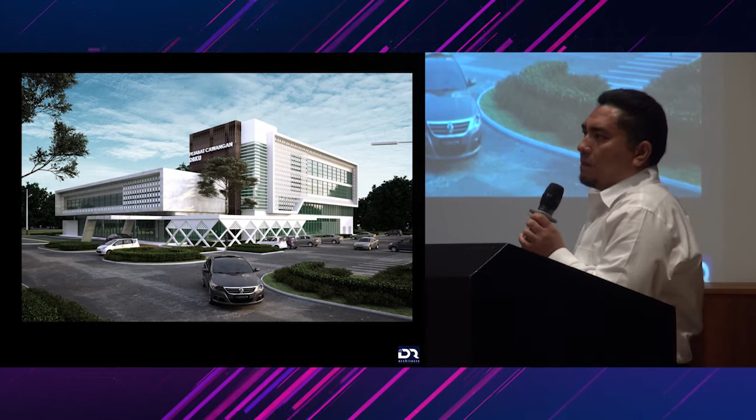We referred to the Sarawak Kena series on Tudung Keringkam, a very detailed research done by Kamen Salem, where in his book he mentioned that there are certain flowers available in Kuching that inspired the embroiderers to put motifs into the design. For example, the bunga kenanga shown in this motif, and the bunga Tanjung, which is widely available at Kampung Tanjung within the DBKU area. With this idea of incorporating the motif into the design, we tried to articulate the facade with this motif.

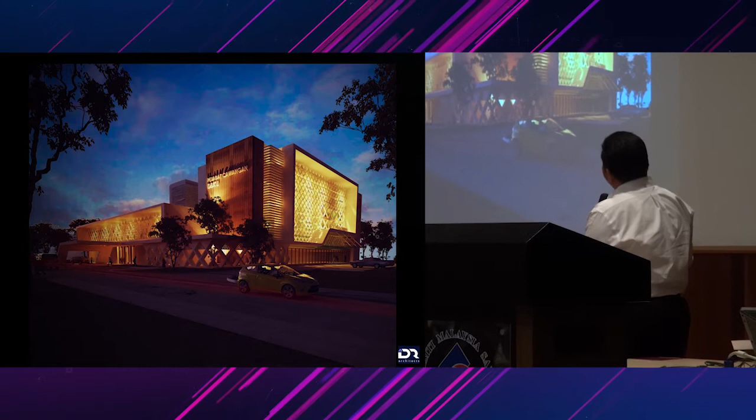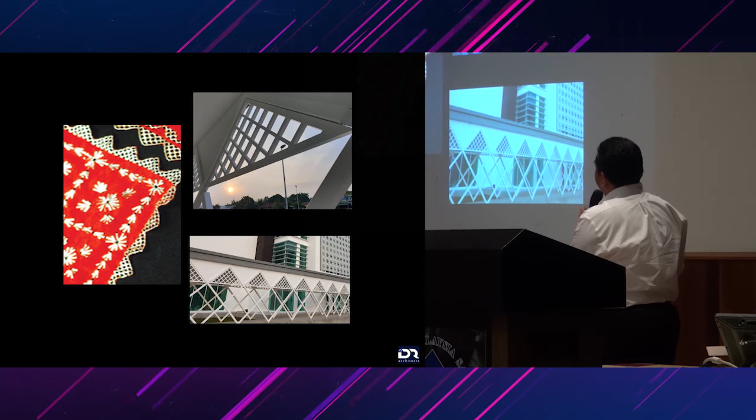We designed the building with lighting to enhance the motif at night. This is the photo showing the newly completed building at Jalan Depot, and as you can see, we tried to express the pattern of the shawl into our structural element. This is the corridor, where you see part of the motif shown as a sun shading device, and we also repeat it in our structure.

This is the surface of the motif as part of the facade articulation, and as you can see, the fabric is actually transparent. So when you are in the enclosed space defined by these motifs, although you are enclosed, you can still see a glimpse of the outside world.

As Margaret Brooke described in her book, she was taught how to wear the keringkam shawl in a traditional manner, where you need to cover one part of your eyes, because the fabric still allows you to see the outside view, with the pattern of the motif cast as shadows onto the floor. So that's how we tried to showcase the cultural element of DBKU in this design.

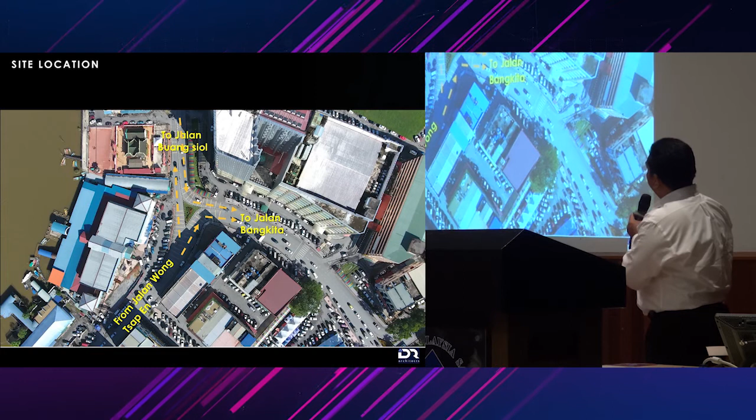The site is shaded as a red colored area. This is the Limbang Plaza. Another view — this area is now being developed as Limbang Waterfront.

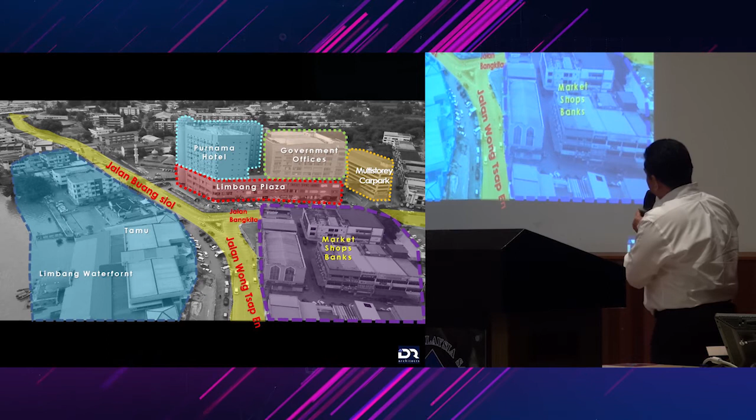So we break down the land use of the area. This red shaded area is Limbang Plaza, where you're going to find shopping malls. This part is the Purnama Hotel, a very famous hotel in Limbang. This is the government office and the multi-story car park. While this area, you find a lot of shops and banks.

This blue shaded area is the Tamu and Limbang Waterfront. The Tamu is very important for tourists to buy souvenirs whenever they go to Limbang, especially the Bruneian.

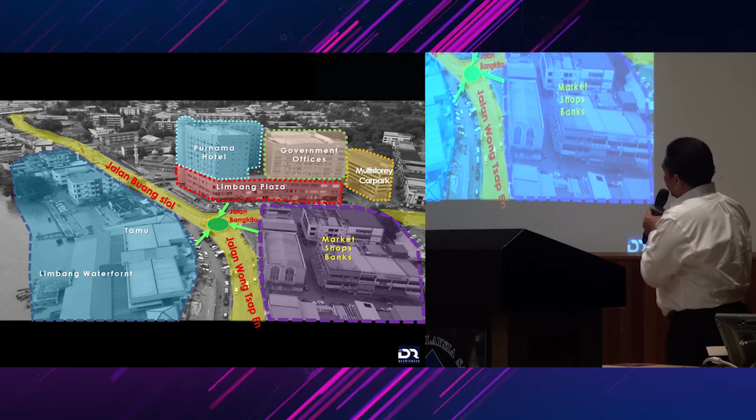So the task is to link all these three different zones by a pedestrian bridge. Looking at this in 3D form, we need to bring up the pedestrian from the ground level up to a certain higher level, and connect it to the center of this green turf area. Then there should be a connection on the first floor of this Limbang Plaza and to the first floor of Tamu.

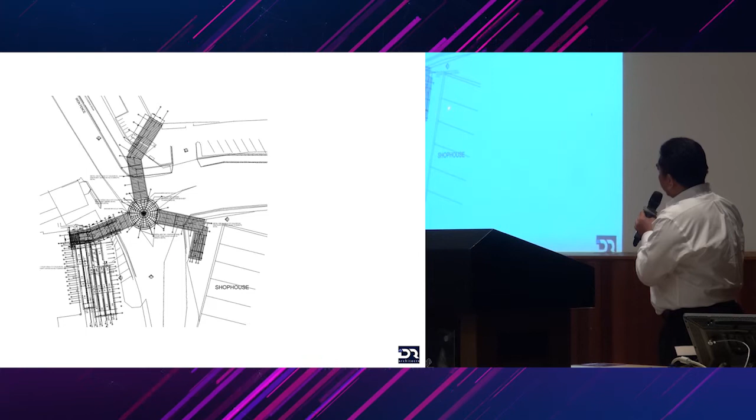Due to the site constraint, because of very limited space for us to locate our structural element, we came up with these floor plans, where from the hotel of Limbang Plaza, going to the center point, and from the shop house also meet there in the middle, and towards this Tamu.

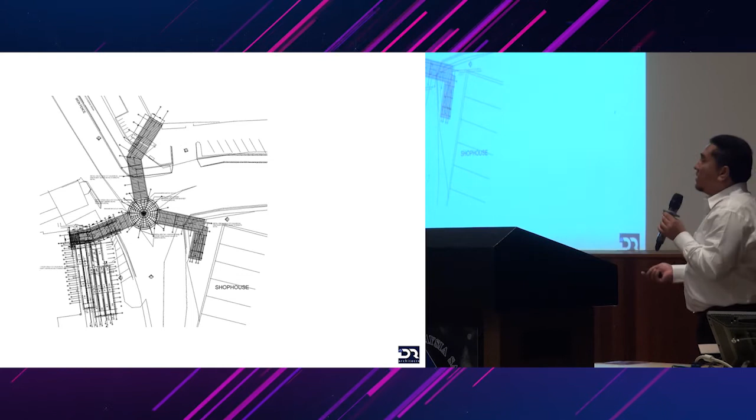When we presented this to the local community, they asked us whether we got the idea from Cap Kaki Tiga. I didn't understand what that meant. What he meant was the shape looked like this. So now they're giving the nickname of the bridge as Jambatan Cap Kaki Tiga.

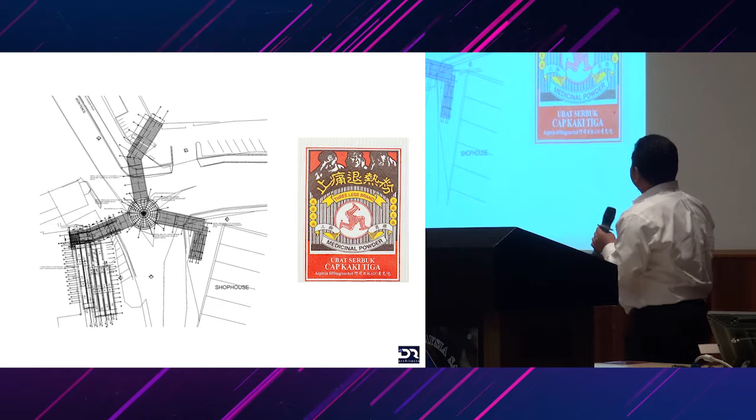So that's on the planning side. We need to design the facade. The strategy is to make this bridge become an important landmark for Limbang. So we look at the idea of repeating the statue element, and we try to bring in the horns, the buffalo horns.

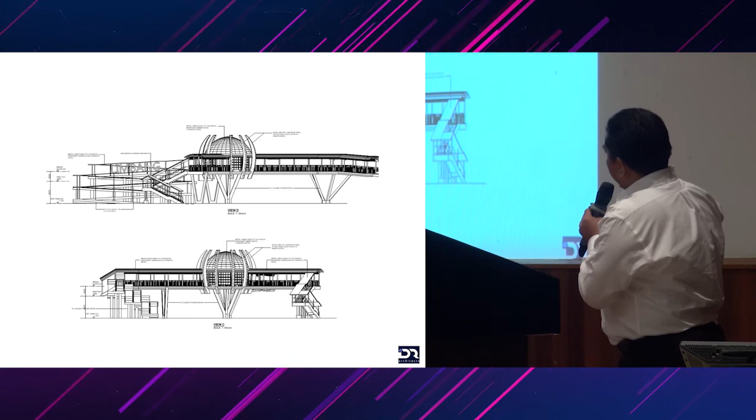Into the facade design. So this is the section of this bridge, and the 3D illustration where the bridge will connect to the Limbang Plaza and the shop house and the Tamu.

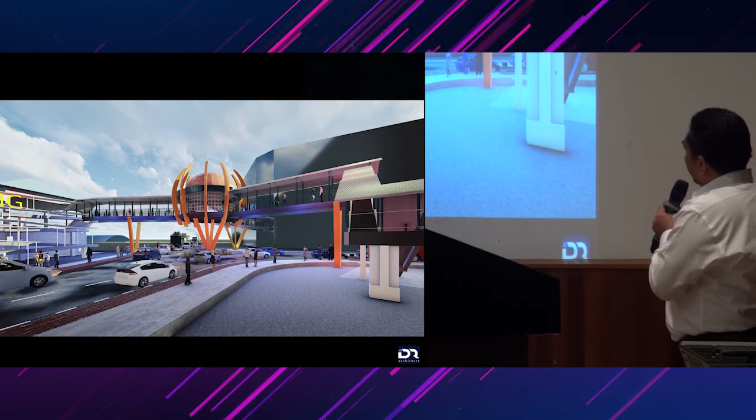There will be a pedestrian ramp here that allows disabled people to use the bridge from the Limbang Plaza. Another view from the shop house area, from Jalan Buangsiol. This is the Tamu, first floor, connected to the Limbang Plaza. Another view from the shop house area.

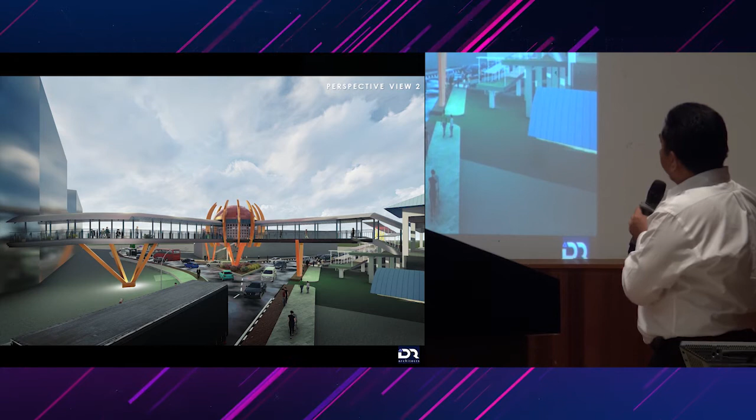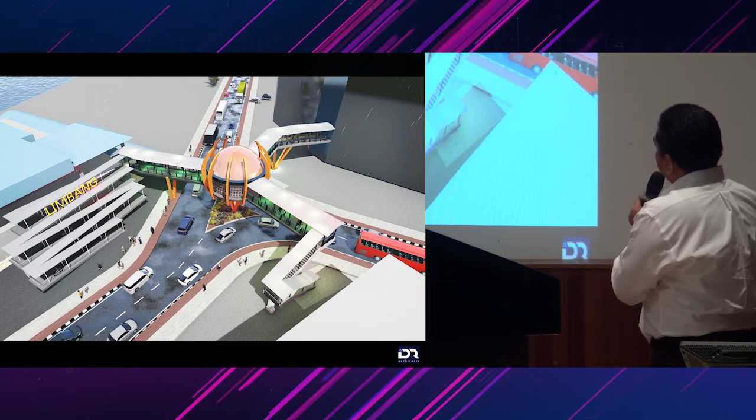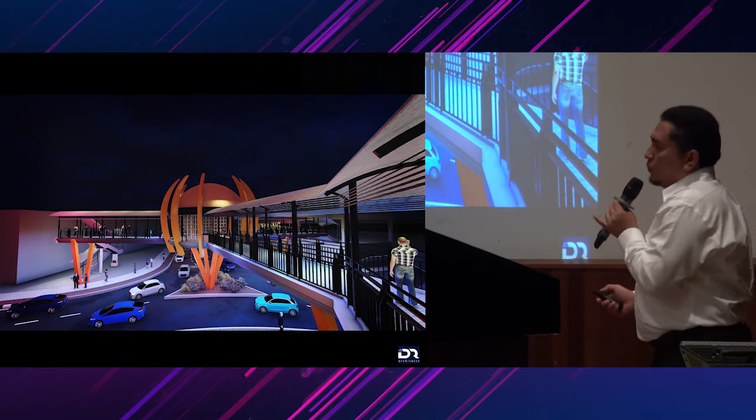So we try to make this part of the bridge an important intersection and also a new landmark for Limbang town. A view from the aerial view of the bridge, and a view at night. This is one of our efforts to celebrate the local culture into the design of the bridge.

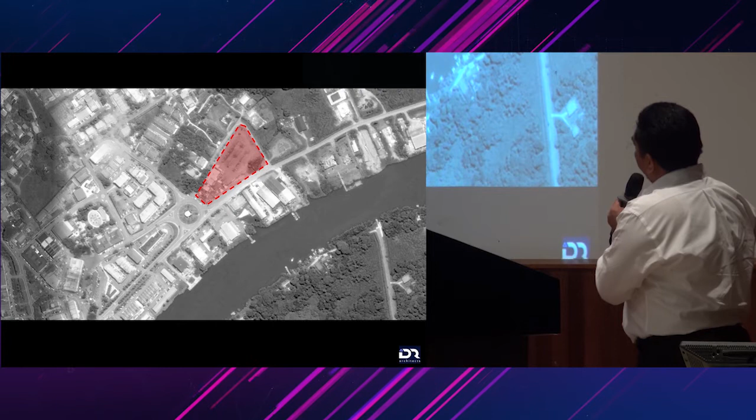Next project is Pasar Tamu Lawas. This Pasar Tamu is located at the previous site of Pasar Tamu. The site is very challenging because the shape is like a trapezoid, and we were asked to arrange the site planning in a proper, orderly manner.

Lawas is very famous with ikan tahai. Whenever people go to Lawas, they'll always bring ikan tahai back as souvenirs. The background of ikan tahai is that fishermen need to find ways to survive during monsoon season, because they cannot catch fish then. So during the time when there's a lot of fish, they will try to produce small fish to preserve some source of income during the monsoon season, and ikan tahai developed from this. They produced a lot of local delicacies using ikan tahai as the raw material.

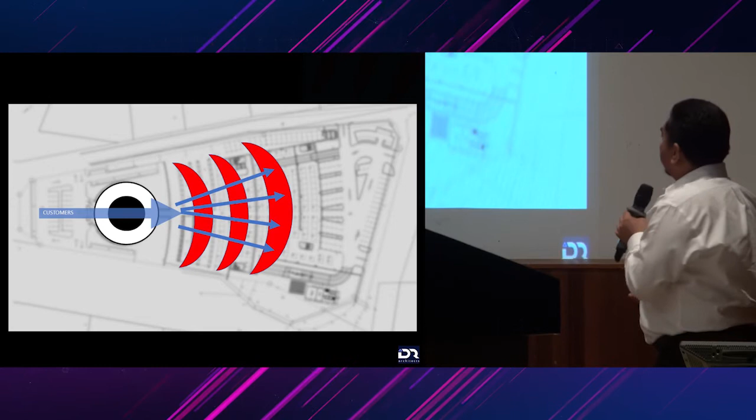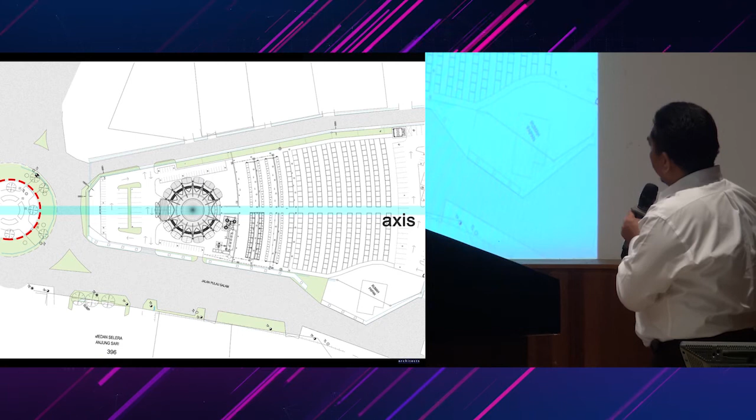We try to use this metaphor of fish, symbolized by the fish eye and the fish gills, representing how this system absorbs the income for the sellers. We try to relate the whole complex to the town by originating the radius of this arrangement to the important landmark of Gasing, Bulatan Gasing, developing the axis from there.

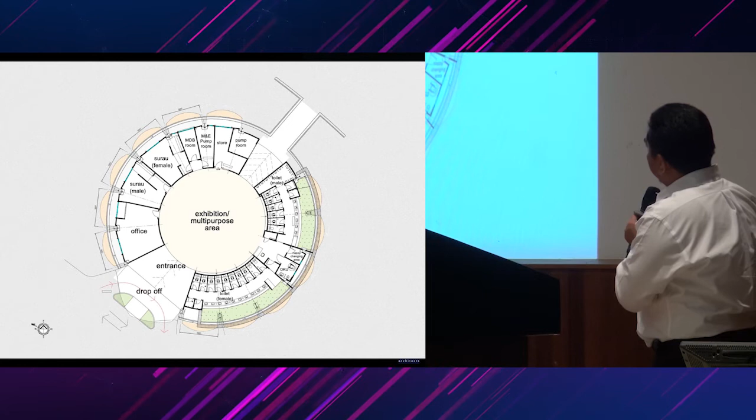These are the accommodations provided at the main building: office, surau, toilets. This section shows the space relationship where the main building, the fish eye, relates to the fish gills, and another bigger fish gill at the back.

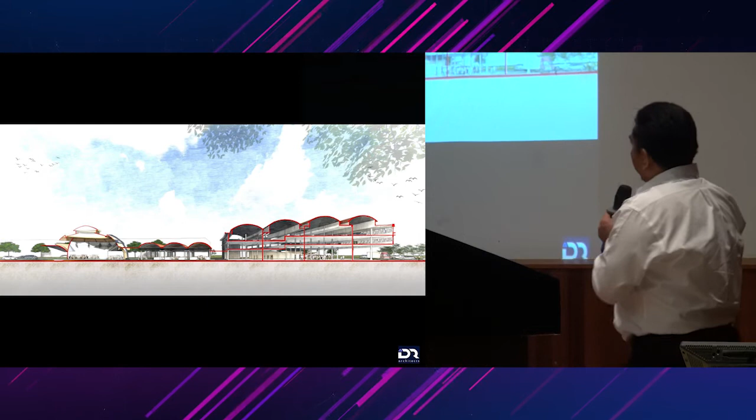Currently, phase 1 is already completed and phase 2 will be tendered soon. This part here will be used for the Tamu Besar, and the upper level will be used for the car park.

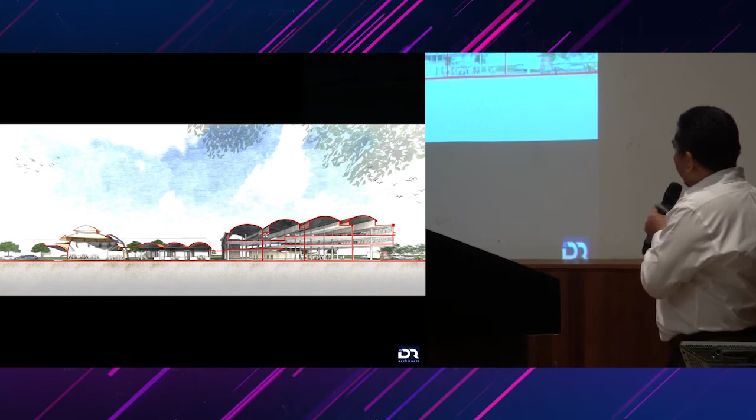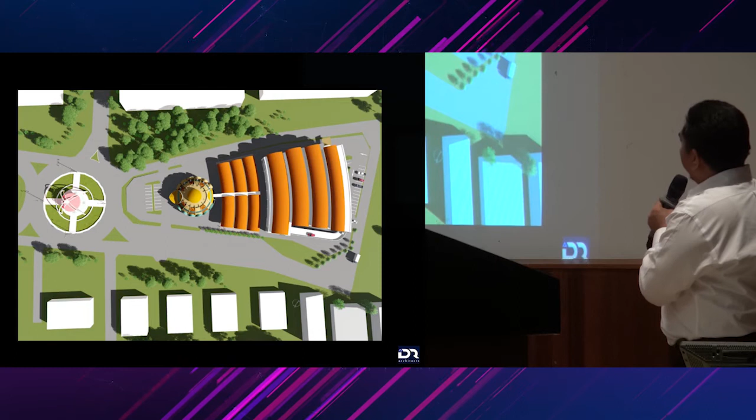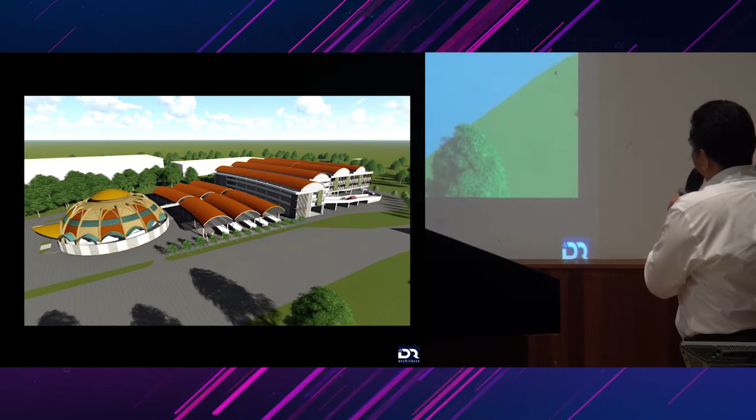This is the full 3D model showing the Tamu Lawas in relation to the Bulatan Gasing. Another view, perspective view of the Tamu, the full scale, the full face of Tamu Lawas, and a view at the back.

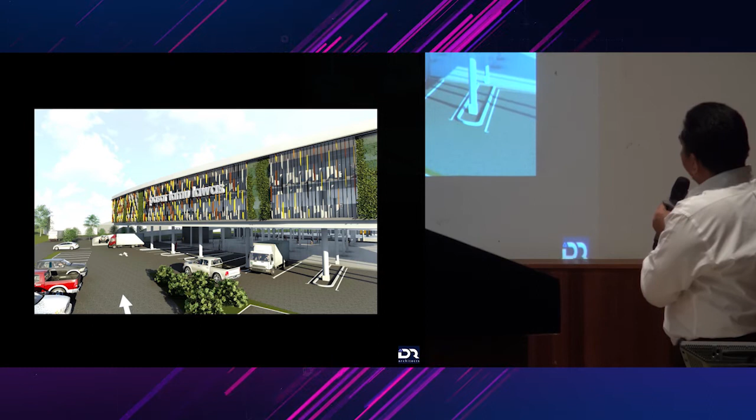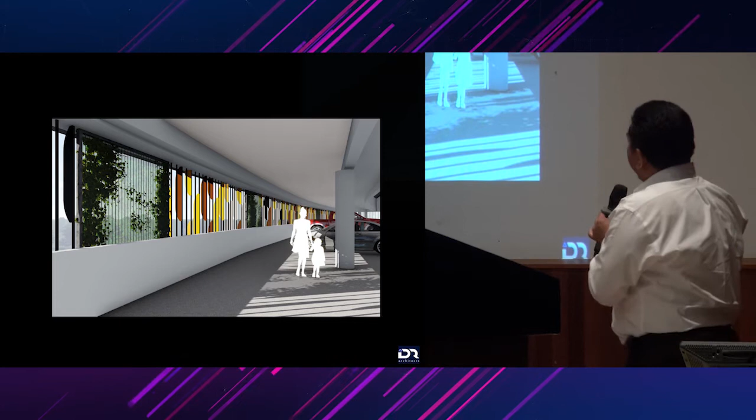The car park will be screened with this sun shading device, where every part is articulated with the so-called ikan tahai scale, the fish scale. We soften the facade with some vertical landscape elements. View at the back.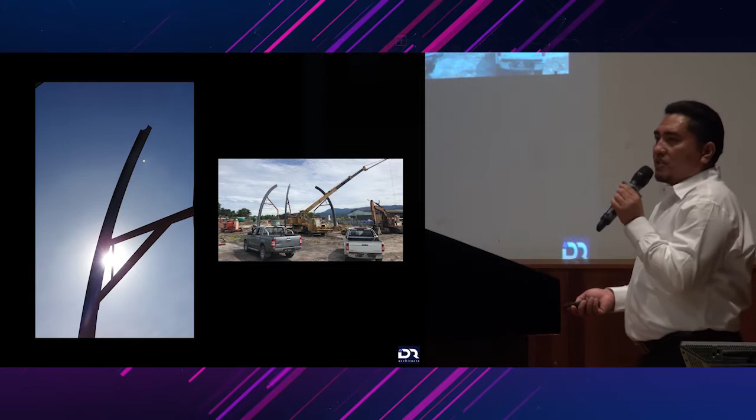So construction started for phase 1. This is the fish eye area, the main building. We use a lot of steel structure.

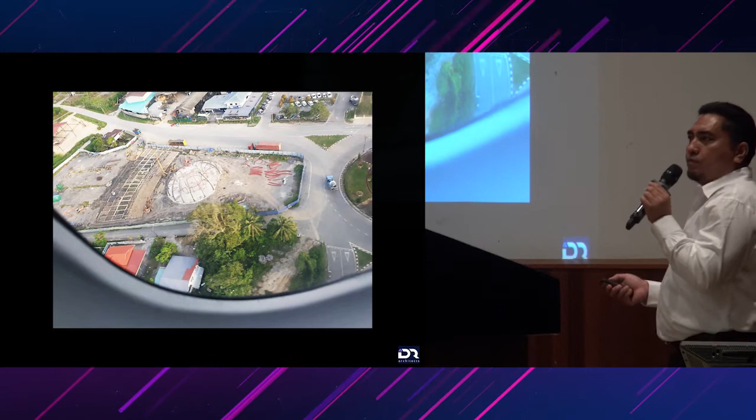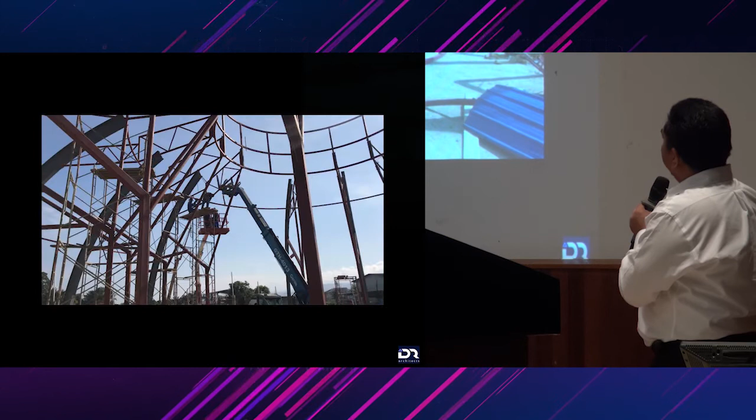Whenever we go to Lawas, we fly using the twin otter, the MASwings twin otter, and we were fortunate to be able to take pictures from the aeroplane itself. This is one of the views taken during the construction period, and the workers start to weld all the steel members and install them into the whole building.

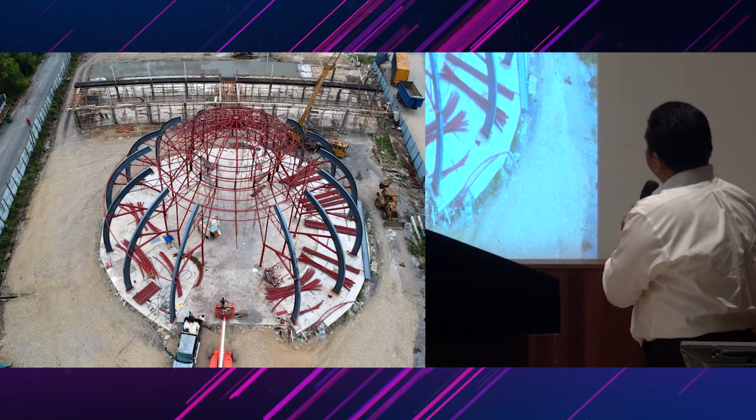I'll show you the progress. There's a lot of steel being used in this construction. Another view, the fish eye and the fish gills area.

This is the Bulatan Gasing that I mentioned just now, an important landmark of Lawas. Another view of the structure. This is the interior view where they start to install the roofing system.

A view from the roof portion of the covered Tamu. As you can see the joints, because the steel structure was prefabricated at the factory and brought to the site, they need to join it by welding.

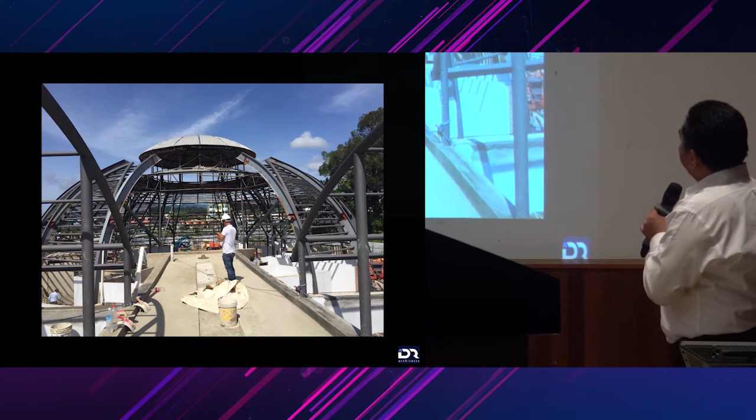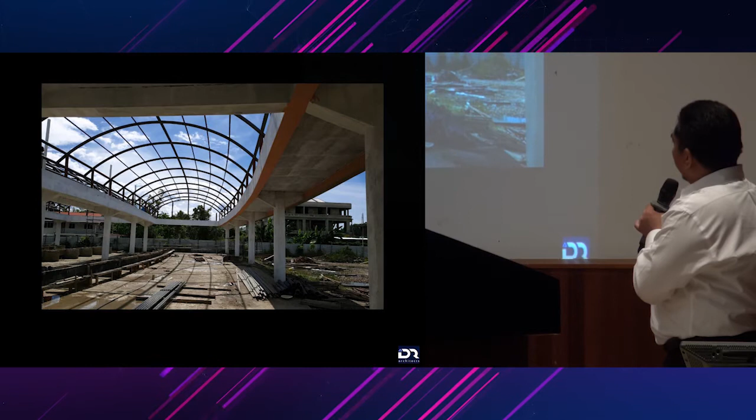Top view, when the roof starts to be installed. This is the view of the structure of the Tamu, where the business is going to happen. And this is the top view of phase 1, when it's nearly completed.

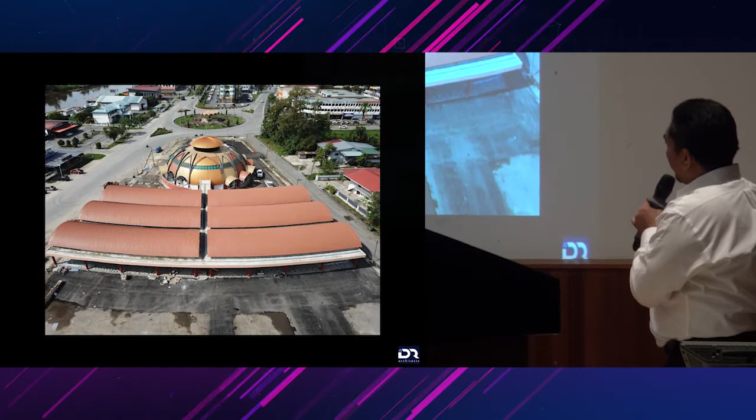Aerial view from the back. Another aerial view, you can see the connection, the fish eye and the fish gills. We try to simulate it using the color of the roofing material.

Detail of the roof of the fish eye area. Whenever we communicate with the contractor, we try to use names like fish eye, fish gills area, rather than saying main building or Tamu area.

We try to provide a lot of natural ventilation, referring back to the fish respiratory system, where they have filaments that absorb oxygen. So this allows natural air to pass through freely.

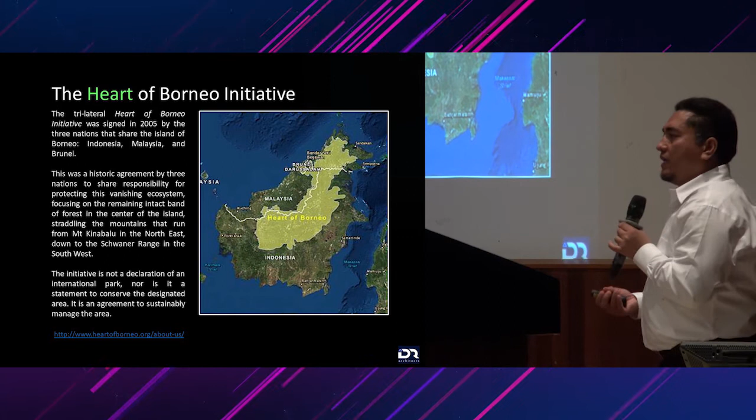Our next project is the Heart of Borneo Interpretation Center, Kayangaran Forest Reserve in Lawas. The Heart of Borneo is an agreement between 3 countries, Malaysia, Indonesia, and Brunei, to jointly manage the remaining forest that has not been touched and to manage it sustainably.

The idea is to protect the flora and fauna in our forest, and also to protect the people who live within the area. So the brief is to design a building comprising a gallery and office.

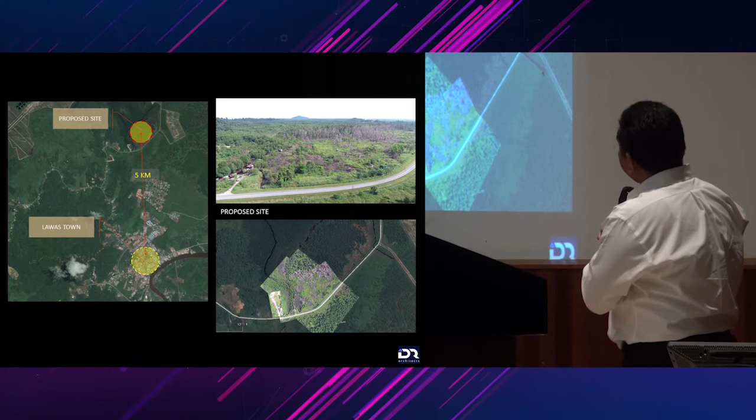If you look at the forest from the air, you can see a network of trees, a lot of trees, giving protection to the life underneath the canopy. If you look from the ground, you can see the canopy being supported by columns of trees.

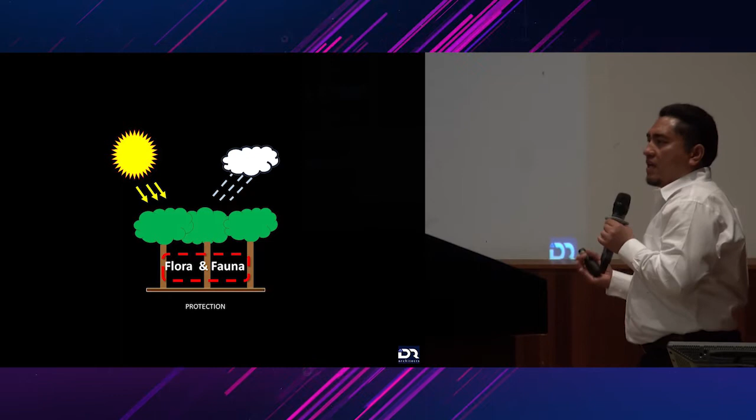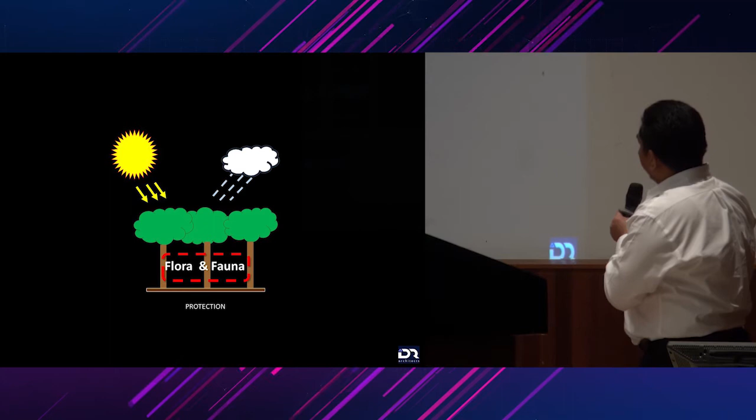So the main idea in our design is to express this protection, because HOB, Heart of Borneo, is about protecting the remaining forest we have in Borneo. The idea is protection, and we got it from nature itself, where trees protect the flora and fauna from the sun and from the rain.

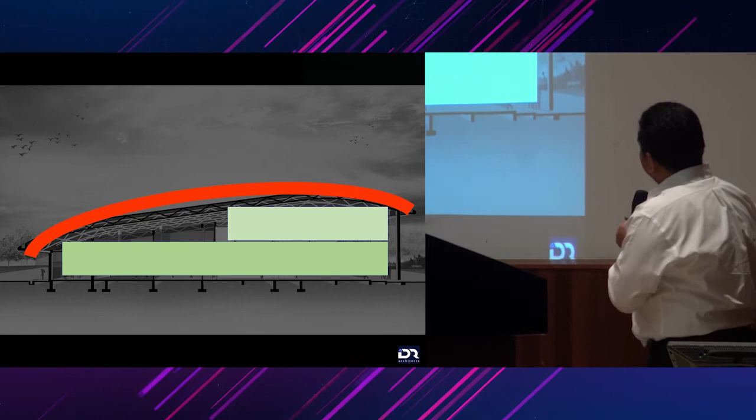So the idea is to protect the spaces underneath the roof, and we want to express the protection by the roof, similar to how the canopy of the forest protects the flora and fauna underneath it.

This is our site plan, showing the building, the car park area, and the green areas.

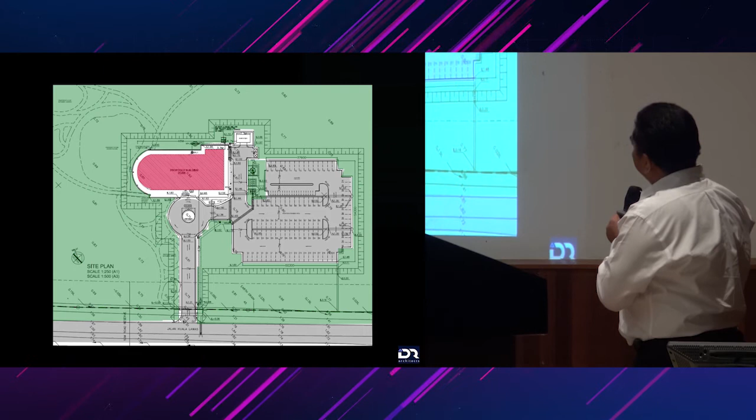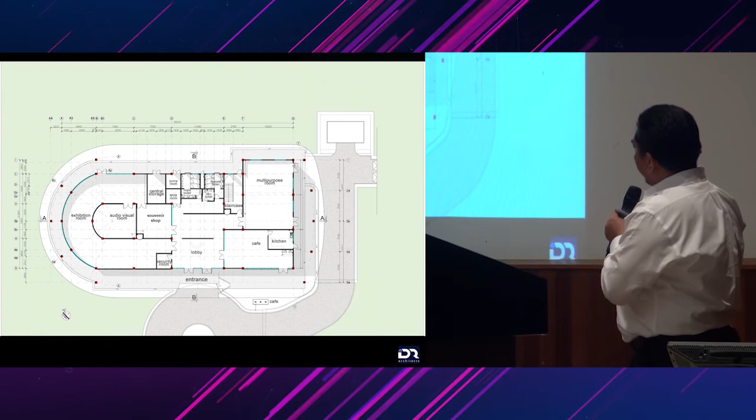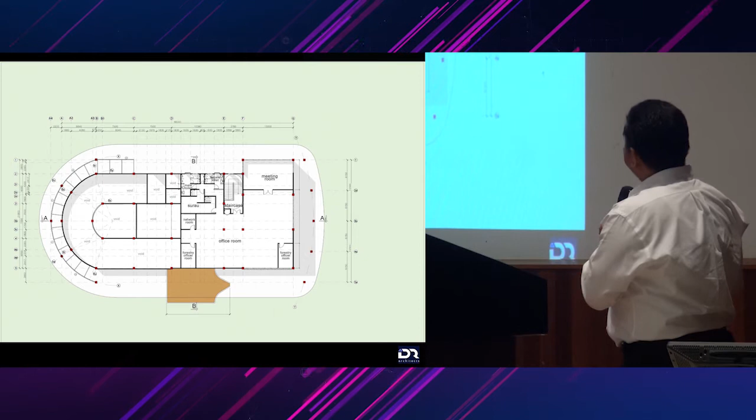The floor plan, the ground floor plan: as you enter the building at the lobby, there's a gallery to your left-hand side. You enter the gallery, enjoy the exhibition inside, and there's an audio-visual room, then a souvenir shop. At the end of your journey, you end up at the souvenir shop to buy some souvenirs. There are also a few other spaces, a multi-purpose room and cafe, and a staircase going to the first floor, where the forestry department office is located. The section shows the space relationship between the gallery, office, lobby, and multi-purpose room.

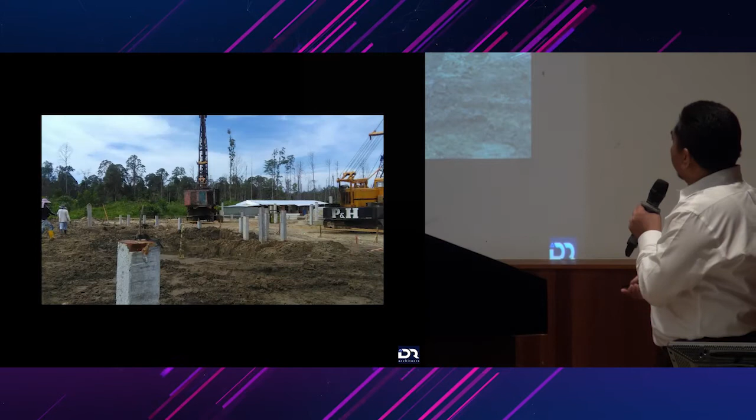The construction started with piling, and again we had the opportunity to take photos from a Twin Otter aircraft whenever we flew to Lawas.

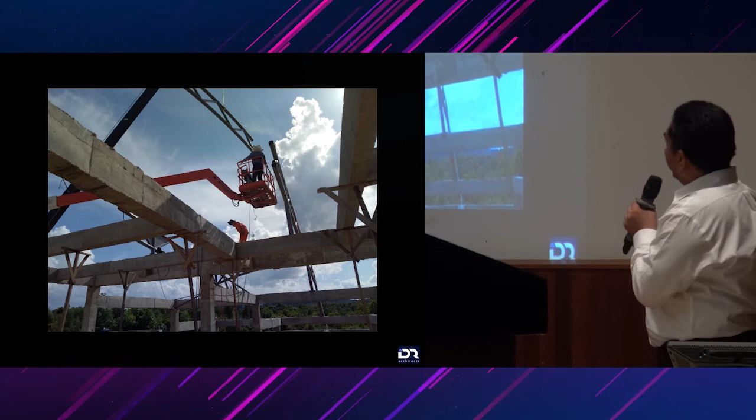The construction continued with the roof installation, and the shape of the roof started to come in.

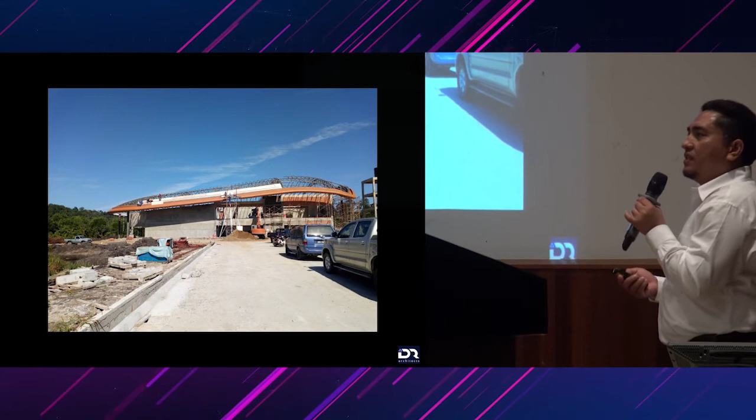We want to express the protection idea, showing it in our roof design. This is the gallery, protected by the roof, and the installation of the roofing material.

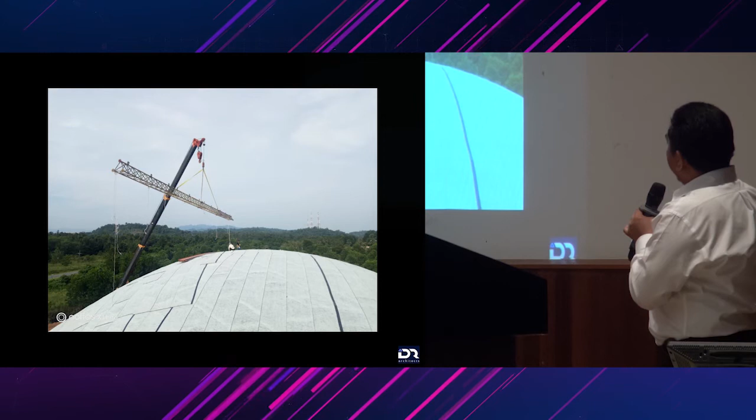Another view from the aircraft, and here the shape of the roof is finalized in the form of the roofing material.

This is the front elevation. Here we want to show how important the roof is in protecting the space underneath. We want to make the roof look like an organic shape rather than a normal roof shape, to mimic nature.

The oblong shape tries to mimic the belian wood seed, because Heart of Borneo is actually a small step in protecting the forest, and one day this center will educate the young generation to appreciate our natural forest.

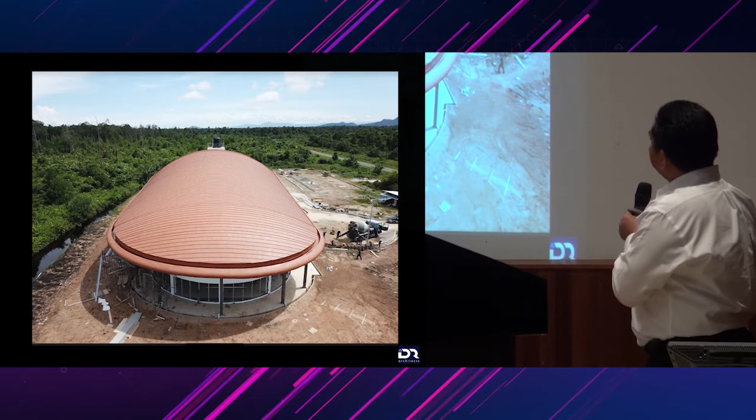Then the detail of the roof, and the view of the roof from the car park area, showing the whole building.

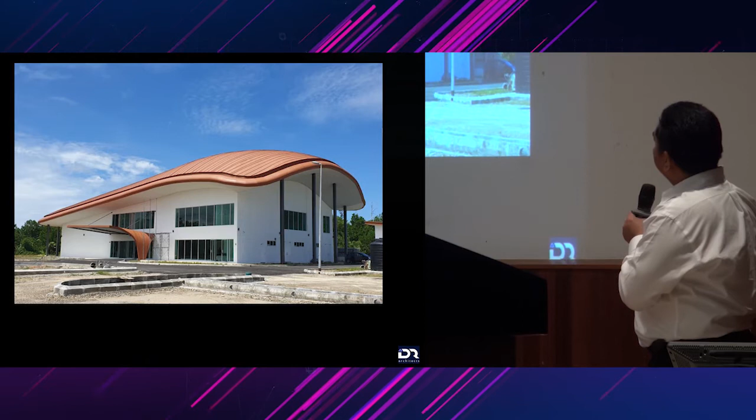Another project we did, actually in UNIMAS, is the design of the proposed student lounge at the Faculty of Language and Communication. This is our collaborative work with RKD Architects; we did it together.

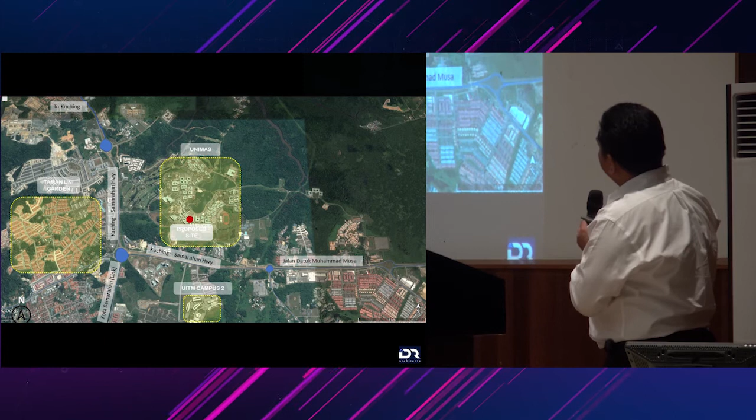I think we are somewhere here, and the site is there. This site is located at the corner of the faculty, and it enjoys a direct view of the lake.

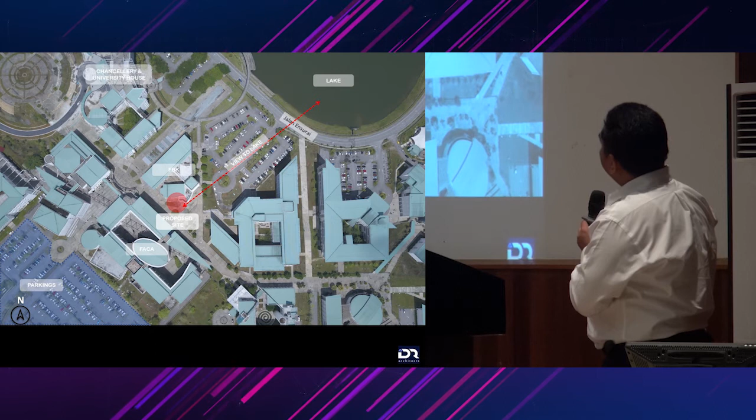The study of the sun path, and the view from the site towards the next building. This is the site, at the faculty building.

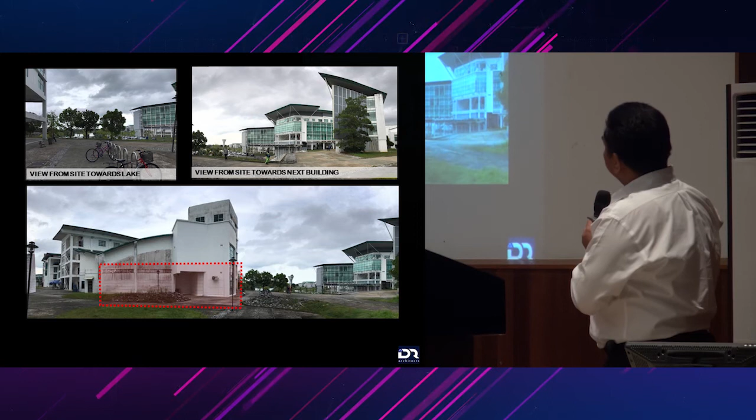The area of the site is only about 300 square meters, and our brief is to provide a cafe, gallery, alfresco, and mini library on top.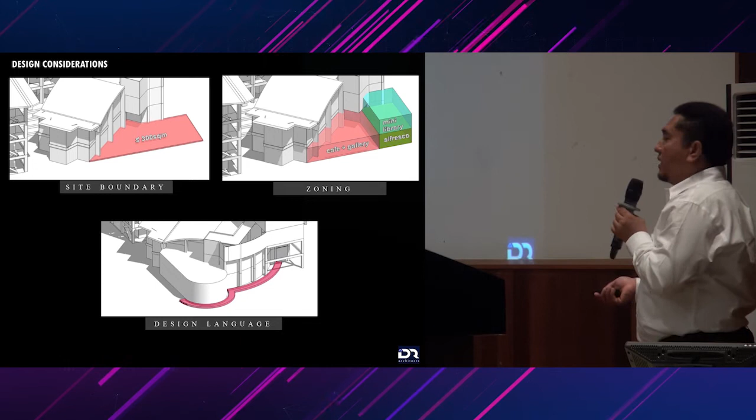For the design language, we tried to repeat the curvature of the existing part of the building into the design, to capture the view towards the lake, and to provide an inside-outside relationship between the inner and outer space. To do that, we used lightweight construction in our design.

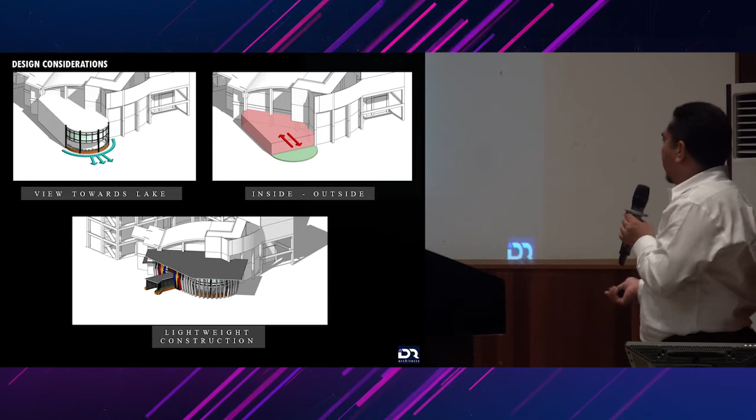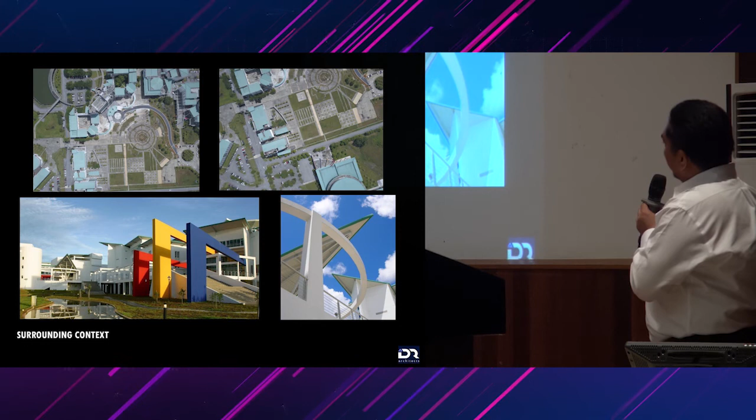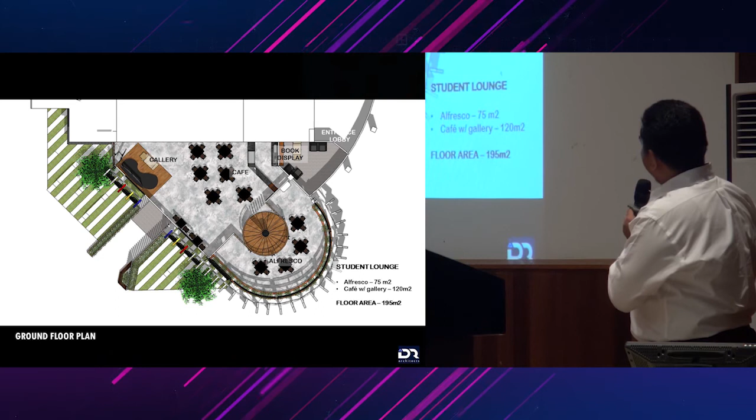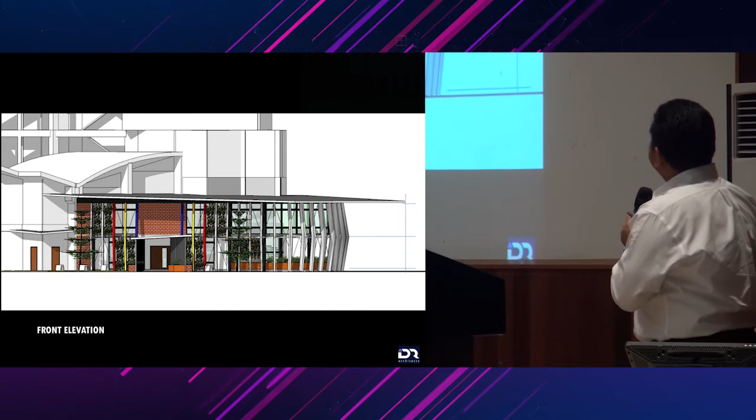The view from outside. Here we try to repeat the UNIMAS colors, blue, yellow, and red, and play with the shape of the structure, the lightweight construction, and the elevation at the right side.

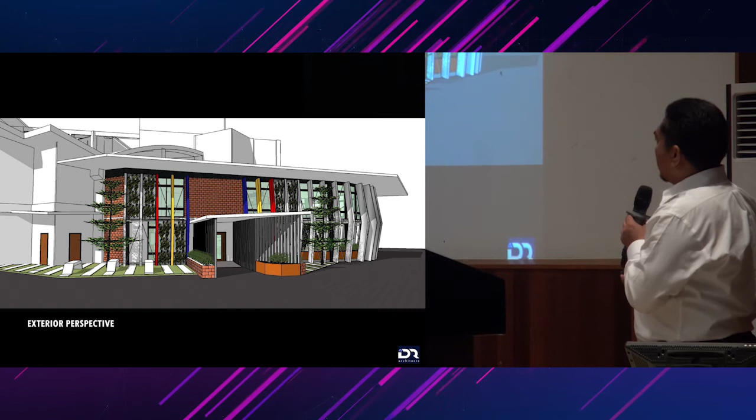Exterior perspective: this will be the outdoor communal area with some benches. Another perspective from outside.

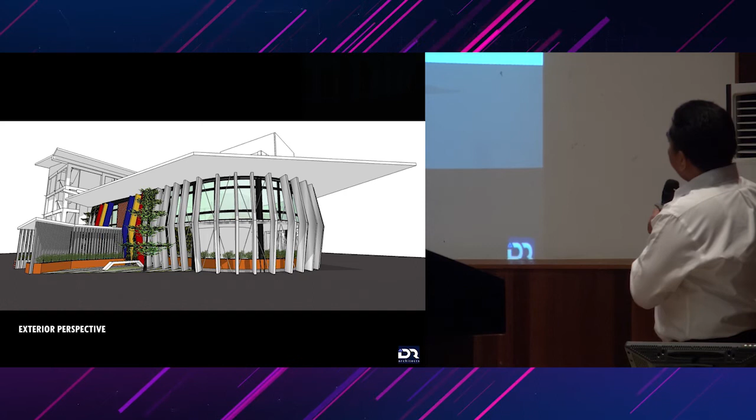In this design, we try to express the lightness of the construction method.

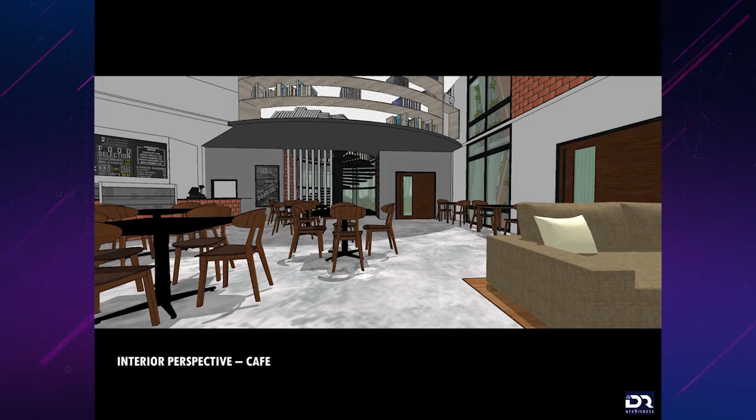This is the interior perspective of the cafe on the ground floor, where we propose a raw concrete look similar to cement render. The cafe arrangement includes a spiral staircase up to the mezzanine floor.

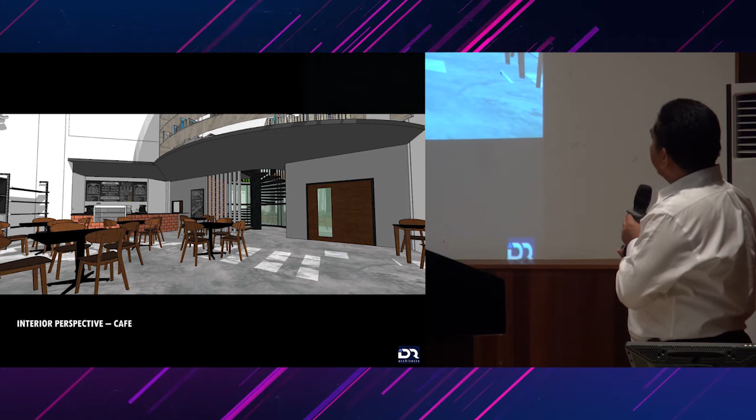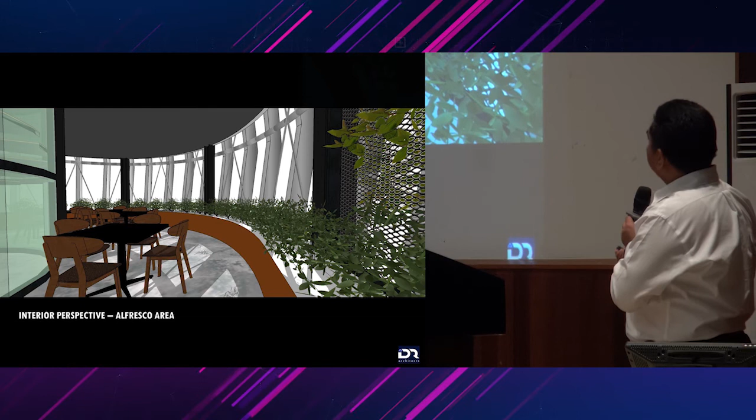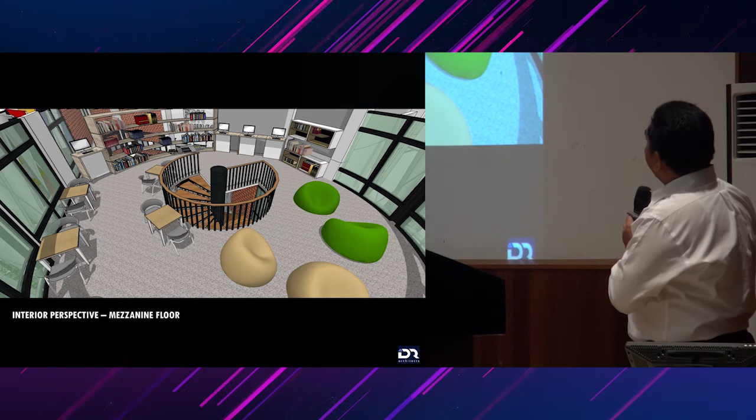The arrangement in the gallery and the cafe. Then the alfresco area, which is open to the view of the lake and has some vegetation inside. The mezzanine floor has books, a mini library, and some computers to be installed.

Okay, those are the works we have done so far. Some of them are completed and some are under construction. All these different projects give us different kinds of satisfaction, as Zaha was quoted: different projects give you satisfaction in different ways.

Currently, we are focusing more on private jobs. We are now involved in some projects in Kuala Lumpur, and I want to show you the current works we did. We are still doing it in phases.